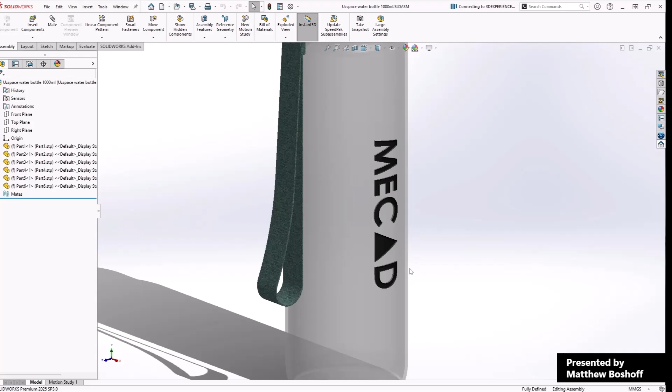We'll start by opening up the file of the bottle. Once SolidWorks is open, we can see our bottle with the logo embedded into the bottle. If we go into our design tree and expand the part, we can then select the wrap feature to highlight its placement on the bottle.

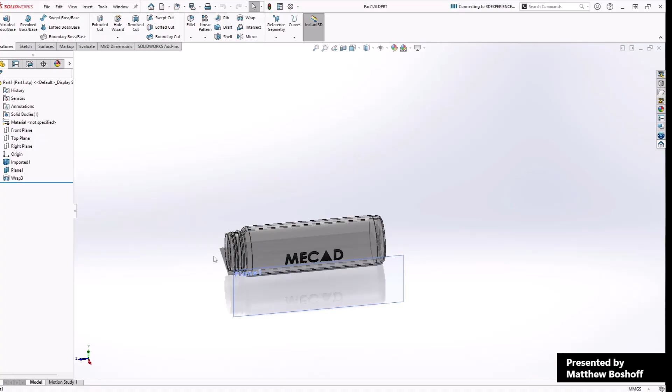Next, let's open the part and take a closer look at the wrap feature. Here we can see a new plane, and when we click on it, we can see that it has been used for our wrap feature. Next, we'll go back in time to see how the wrap feature was created.

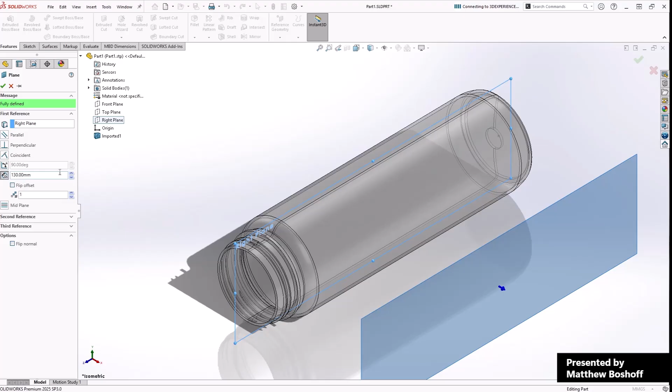Firstly, in the Features tab, select Reference Geometry and then choose Plane. We'll select the right plane as our reference and create an offset plane that sits just on the outside of our cylindrical face. Now let's create a sketch on our new plane. We'll select the plane and click Sketch.

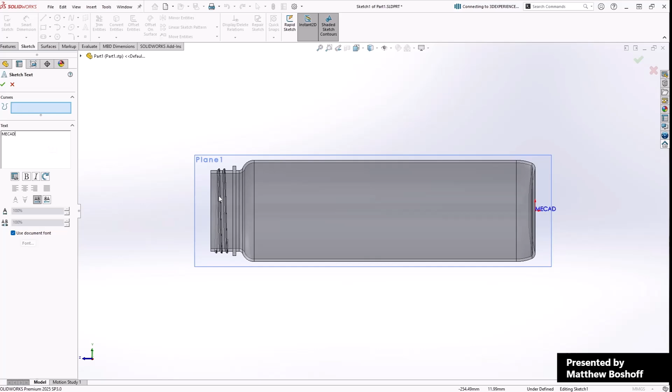From the Sketch tab, select the Text tool. In the Property Manager, type the text you want to wrap. In our case, it's MECAD. To customize the font, uncheck Use Document Font and click the Font button. Here you can change the font style and size. We'll set the size to 72 points and click OK. Our text now appears on the sketch plane.

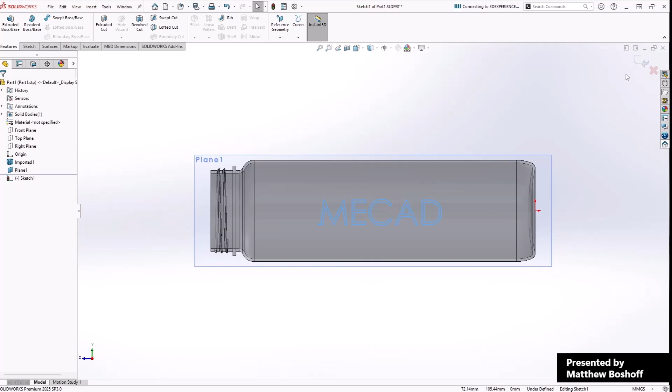Once you're happy with the placement, exit the sketch. With the sketch still selected, go to the Features tab and click the Wrap command. In the Wrap Property Manager, the first step is to select the face you want to wrap the sketch onto. We'll select the main cylindrical face of the bottle.

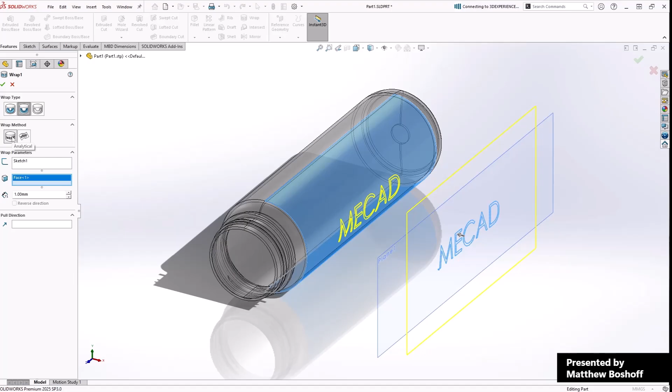Next, we choose our wrap type. We can choose between Emboss, Deboss, and Scribe. Underneath, we can see our wrap method, where we can choose from either analytical or spline surface. And there you have it. The sketch is now perfectly embossed onto the curved surface.

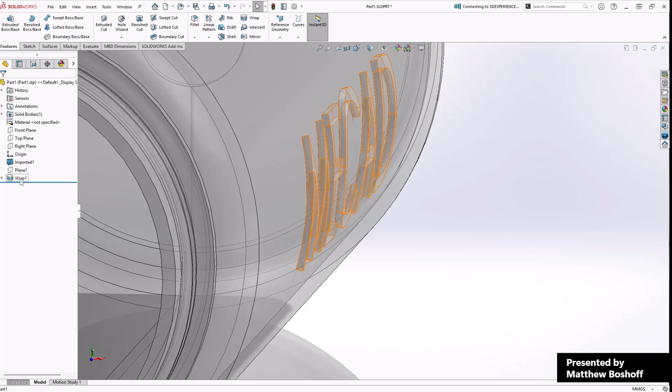Let's look at the other options. We can edit the feature and switch the wrap style to deboss. This will remove material instead of adding it, creating an engraved effect. As you can see, the logo is now cut into the surface of the bottle.

Finally, we can now take this bottle and insert it into SolidWorks Visualize, so we can see a more realistic looking version of our bottle.